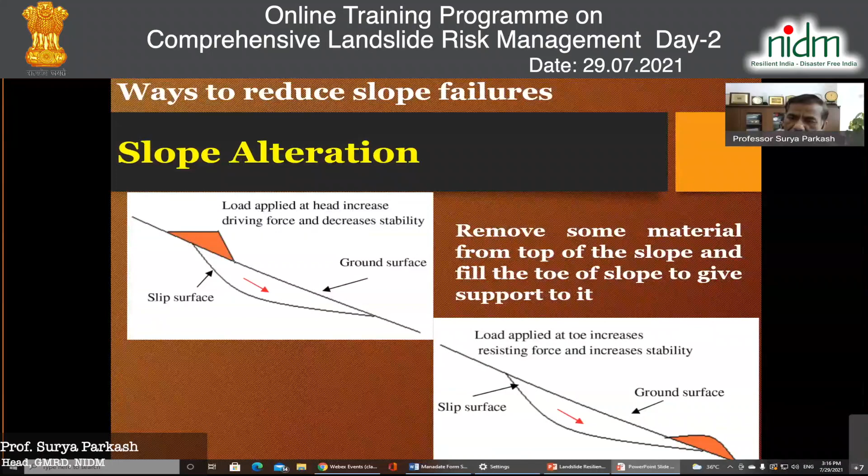However, if you put this load at the toe of the landslide, it will act as a resisting force and can increase the stability. So it will depend on where you are making the alteration of the slope and what kind of loading, unloading, and drainage changes you are making on these slopes.

I'm showing one of the better practices in terms of putting load against the toe of a landslide in order to stabilize it, or to resist the movement of the slope mass, by putting a weight against the movement. So people have created berms, and this weight of the berm is placed close to the toe of the slope's rupture surface, which prevents its outward and downward movements. So that will help in stabilization.

So if we are constructing a house - on the lower side diagram on the right hand side, I have shown a building located on a slope. Close to that building, they have created a berm so that the instability of this slope should not affect the building, and the slope should remain intact because of the opposing or resisting force created by this berm.

I told you about loose and unconsolidated weak materials, but there can also be good strong rocks with a large number of discontinuities, structural or tectonic features. In that case, there are likely different types of landslides, normally termed rocky landslides or debris landslides generated by rock debris. This may be a rock fall, topple, wedge slide, or planar slide along a discontinuity plane, or intersection of discontinuity planes daylighting into the valley.

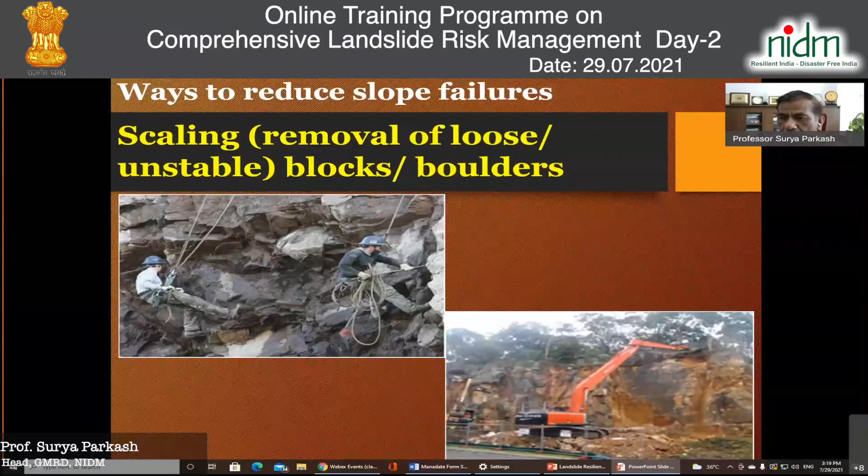Another simple feature I've shown in the photograph below. So these are the ways we try to do scaling, trimming, and create a geometry that is more stable than the existing geometry, relief, or morphology of those slopes.

Now, if the slope height is too high and the gradient is steep, it's likely that material will come down, because the stability of the slope will depend on the slope angles and also the cohesiveness and friction angle of those materials.

Angle of repose will also determine the potential angle of slopes that can sustain and stay safe. So what we need to do is maintain a relative height that stabilizes those slopes and does not destabilize them. We can measure the heights of the slopes and create benches so that stability is ensured. Once you create benches with appropriate heights, that also needs to be maintained, so you can create some kind of structures.

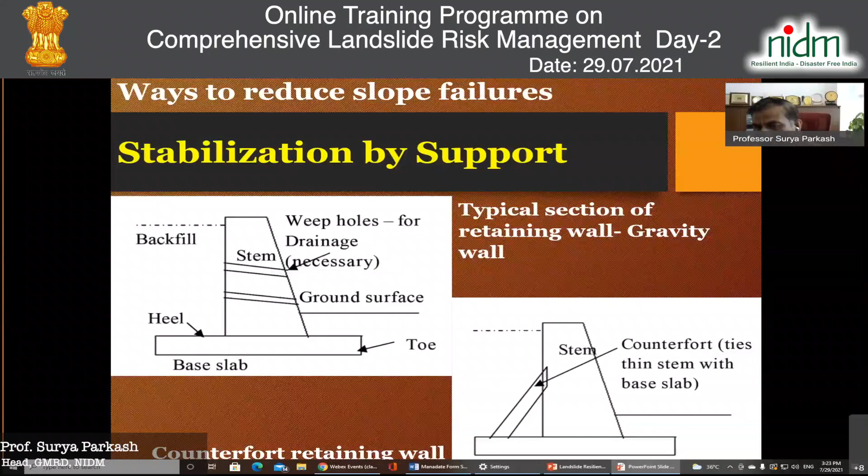So if you have a space to construct appropriate foundations with a base slab and create a retaining structure, either as a breast wall or as a retaining wall, it will help stabilize that area and prevent the slope mass movements. Sometimes if you don't find adequate space and feel that the wall is not well integrated with the slope, then you can also use counterfort tie systems with that stem wall.

These walls may not be just cement concrete walls, boulder masonry walls, cut stone masonry walls, or brick masonry walls, but you may also use some kind of reinforcements to bring flexibility into the walls so that it can have some kind of elasticity. You can use steel bars, and if used, it will also help reduce the sectional area of these walls.

So these retaining structures, you can see on one side I've just shown you a sketch, and on the other side I'm showing you a building with a retaining structure on its downhill side, which is preventing the movement of the mass and also providing stability for the structure against the impacts of landslides. Now there are several means to provide stabilization in and around the building areas.

Slopes a little away from the building itself may also start sliding and retrogress upwards, and that retrogressive failure can lead to engulfment of a building. So for that reason, we have to not only take care of the peripheries of the building, but also the surroundings of the building, which can also result in impacts on that particular building.

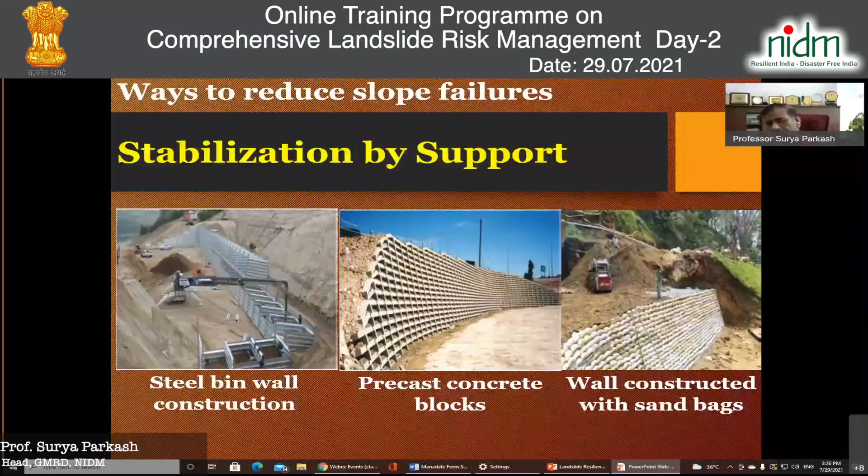In other cases, where the materials are strong and intact, you can use ground anchors, or with good soil conditions, you can even use soil nailing methods. But these nailing techniques are not yet common in India, and it needs to be practiced more. Similarly, rock anchors with bolts or pretension anchors are possible mechanisms to prevent failure in rock slopes.

But there are three different types of materials you may come across in any slope in the hills. Basically, broadly, these are defined as rock masses with discontinuities present within or across them - they may be massive also. The second is debris, a mixture of soil and boulders or rock fragments, where more than 20% is aggregate rock masses or pieces found in the debris material. Then you may come across earth or soil, which has very small grain size, normally less than 2 millimeters, which can also get destabilized.

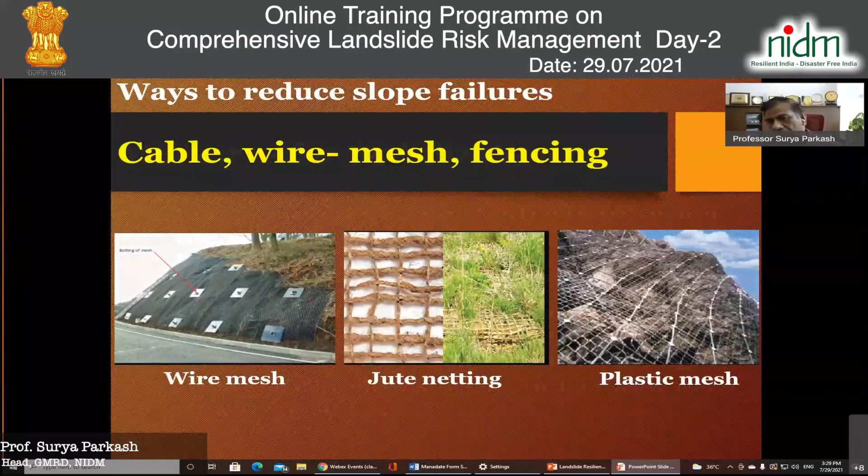So stability problems most often occur when a house is built over soft soils. Particularly, if you have a mix of permeable and impermeable materials, that can be one of the reasons for landsliding. Or materials made of clay minerals, for example montmorillonite or bentonite, which swell and shrink very fast with the ingression of water into them. This swelling and shrinking sometimes results in development of cracks, destabilization and displacement of the slope mass.

So this kind of nature of the material underneath or around the building must also be properly examined, and one must get geotechnical investigations done into those areas besides the local geological, geomorphological, hydrological and land use land cover conditions.

Determination of these geotechnical properties will include the stiffness, compressibility, cohesive forces, and pore water pressures that are likely to affect the strength of these materials. Both in situ tests in the field and laboratory tests by taking samples from the field to the laboratory are possible.

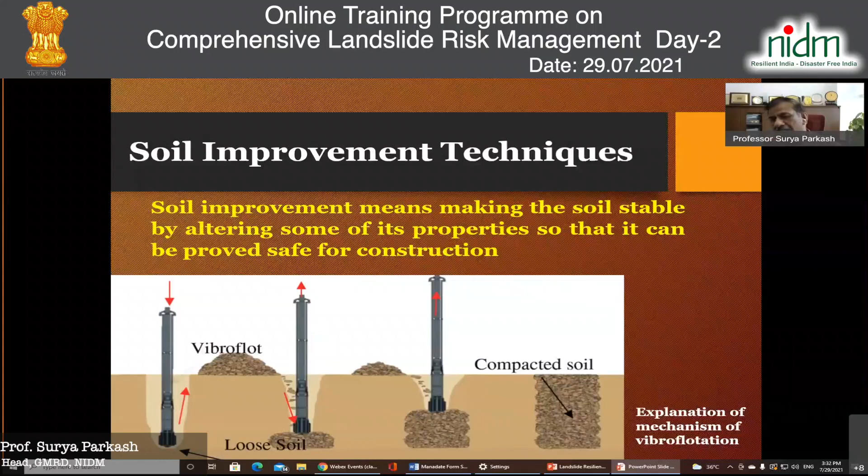I'm just showing you a picture where compression leads to the upcoming of a soil mass, because this mass, which is unstable in one area, when it gets compressed, the other areas exert and try to release that compaction pressure, and we have to actually compress or compact the whole area.

Soil improvement techniques are many. One is static loading conditions - you just put up load at a particular site, and under that static pressure, the soils get densified and compacted. But you can also use dynamic compaction techniques or rollers, which use cyclic loading conditions, making it stronger over a period of time with multiple impacts of that load through a dynamic process.

Then, if buildings are located on materials which have a thick deposit of unconsolidated, loose or weak materials, with a rocky mass below that layer - maybe 2 meter, 3 meter, 5 meter - and a big building construction is required, then you can also go for pile foundations. Pile foundations may be precast piles, or you can go for in situ pile construction techniques. These piles will take the foundation into the stable rock masses, so the building will not easily get affected because of the superficial unstable soil mass or debris mass.

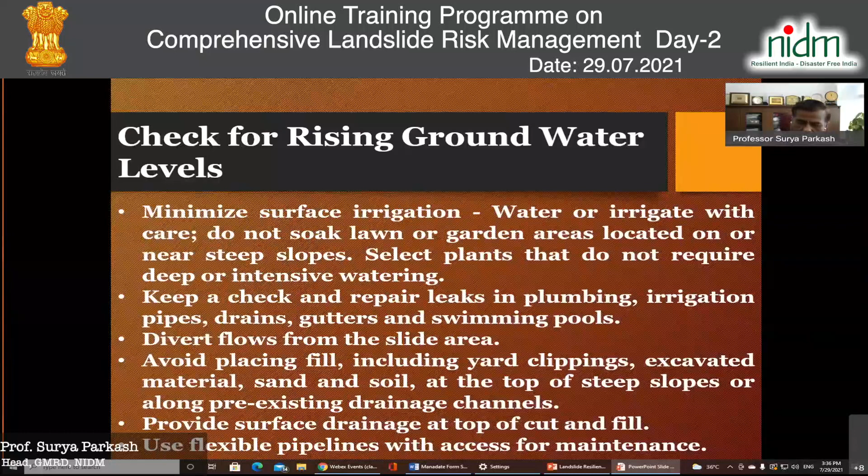These are some suggestions I've told you. But an important thing to take care of is that because we are constructing on slopes, there will always be some degree of instability or movement and displacement. In those cases, the material we use for pipelines or channels should be flexible so that it doesn't get easily ruptured. That kind of design and material must be utilized.

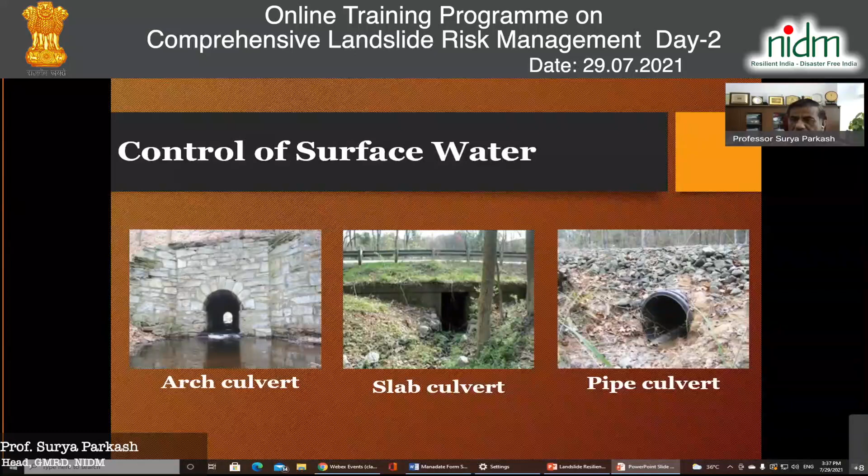Control of water is important - sudden, speedy, fast flow of water can lead to scouring and erosion or loss of toe or bottom of hill slopes, causing landslides. Normally in Indian standards and codes, we prescribe construction of side canals, side drains along roads, and disposal of this drain water through culverts into the main river system appropriately. Similarly, for areas covered by buildings, we should have appropriate drainage design, construction, and maintenance so drainage does not affect slope stability. I've shown you different types of culverts or pipes used - flexible pipes, slab culverts, or arch culverts. There can be many designs depending on geometry and materials used.

It's important, if living in a building on a slope, to regularly check for signs or precursors of landslide failures. These may appear as development of cracks within the ground or walls, or gaps between frames and doors or walls. All these things we've mentioned must be witnessed and monitored well. Sometimes you see differential settlement, bulging, or development of cracks within or around the building.

In such cases, you must use flexible structures with brickwork, concrete work, timber, or steel frame or panel claddings, so that movements can be registered or opposed, and water that is blocked and creates pore pressure may be appropriately released. If it's the relief or slope gradient causing instability, that should also be modified and adequately protected with engineered retaining walls or biotechnical measures at an appropriate slope and height.

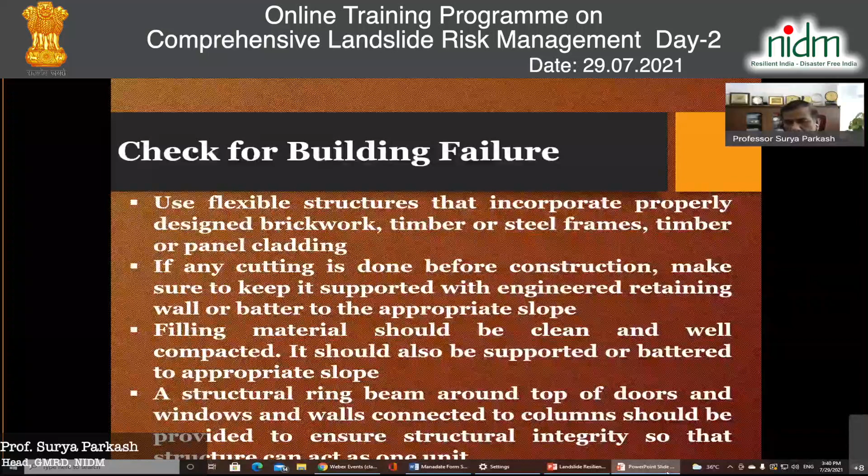So these are some of the things which need to be done. Now, in any building construction, you are using different types of aggregates, which include the cement, sand, and aggregate mixtures,

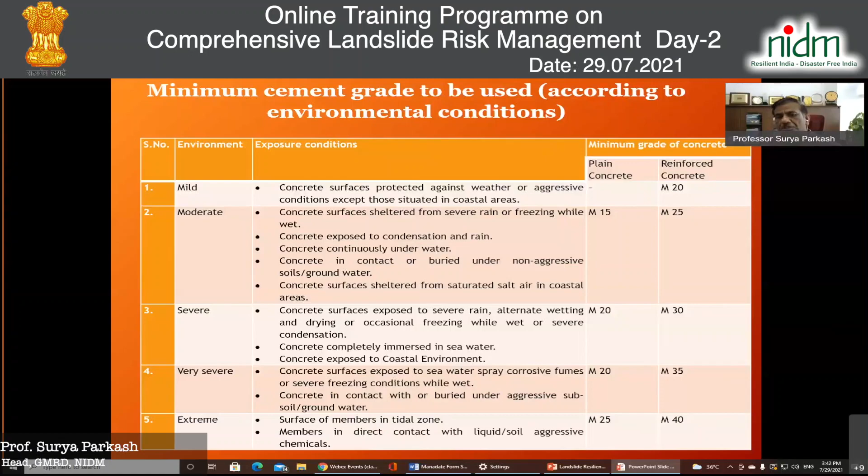and there are different prescriptions for different types of environments under the codes, which I have just listed. If it is mild environment, meaning the concrete surface is protected against weather or aggressive conditions except when situated in the coastal area, you can use reinforced concrete with M20 ratio, that is 20 megapascal should be the strength of that material. You can use these similarly in other areas. As you go to higher risk areas, a higher strength of material is required, so we prescribe M30, M35, and M40 depending on the situation in that particular area.

Some important considerations: first, in any building construction, is siting, where it is located, and the stability of the slopes where the plot or ground is located for construction of the building. After ensuring the stability of the ground or slope, you have to look into the foundation of that building. That foundation should get well integrated with the slope mass or ground mass so it doesn't move easily. So the type of foundation, material for the foundation, and construction techniques also need to be taken care of.

I suggested some of these foundation techniques which are being followed by our civil engineers. For example, for short story, small buildings like residential buildings, maybe up to 3-4 stories, raft foundations are used, and this foundation is particularly good if you get across a rock mass. If the rock mass is fissured, we must go for grouting to strengthen that material or go for anchoring of the rock mass.

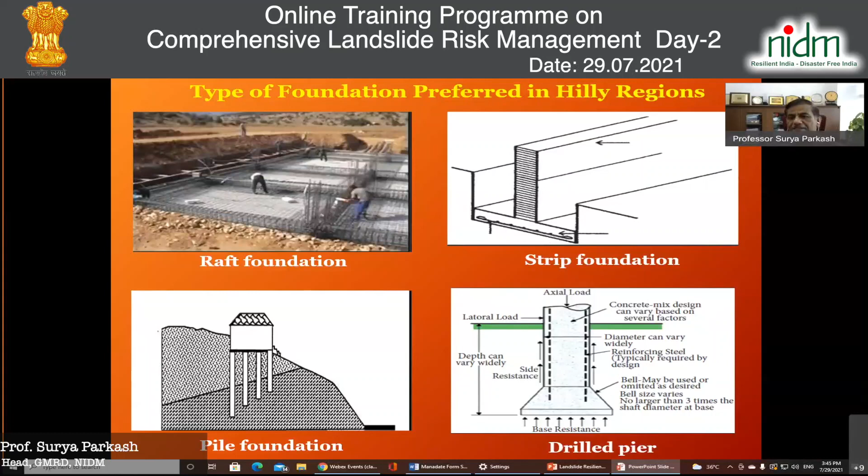Just showing you some of the types of foundations that can be utilized on buildings on the hill slopes: raft foundation, strip foundation, pile foundation, and drilled piers. Sometimes when the building is too big and heavily loaded, and the slope mass is too unstable and weak, we can also go for pier drilling.

The traditional building materials which have been used include earth, soil, wood, timber, bamboo, mat, corrugated iron sheets, stone, bricks, concrete, asbestos sheets, lime, slates, etc.

Whereas in today's world, people are using alternates. They are now using more concrete blocks, ash bricks, fly ash bricks, precast stones, concrete blocks, and stabilized soil blocks, etc. I'll tell you an example: in Leh, when they were using sun-baked bricks, they failed. The buildings collapsed when the flash floods happened in August 2010.

Similarly, even the walling materials can vary, both in the traditional and alternate building materials being used. I'll not go into more detail because I know there are other speakers also to talk, so I'll just skip the detailed part of it.

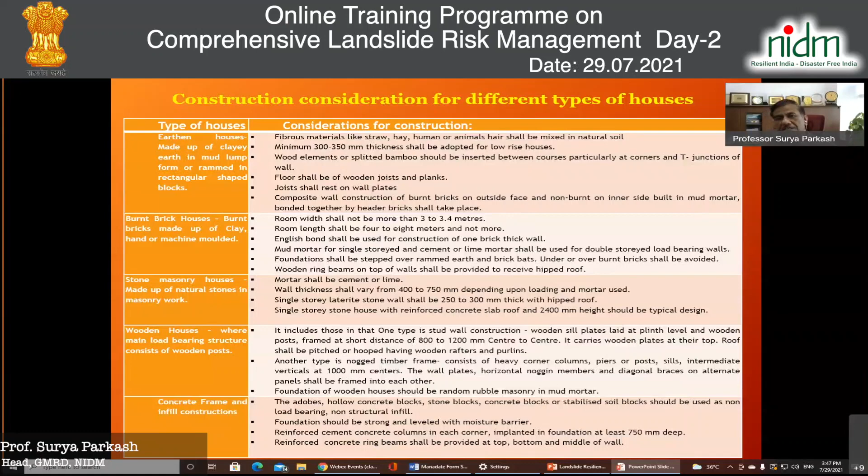You can learn more from our book, which I have already told you has been prepared on construction of safer buildings on unstable hill slopes or hilly terrains, which will guide you on different types of buildings, for example earthen buildings, wooden buildings, or stone masonry buildings. Depending on the type of material and construction techniques, they will vary, and accordingly we have to check and examine the impact of these buildings on slope stability, and take appropriate, timely protection and mitigation or preventive measures.

Now, despite all our efforts, nature being mightier than man, we may come across landslides in the built environment. Now, landslides in built environment will also give us early warning in terms of precursors or signs of failure, and these must be timely observed so that lives are not lost.

Besides the elements of the building, there are many service lines and utilities, for example sewerage pipelines, drinking water pipelines, or irrigation pipelines or canals, which may get leaked or ruptured and release water into the slope masses, resulting in landslides. I remember there was a landslide in Sikkim, close to the Sikkim Supreme juice factory, where leakage from a pipe led to destabilization of the slope mass and a major landslide that affected that factory.

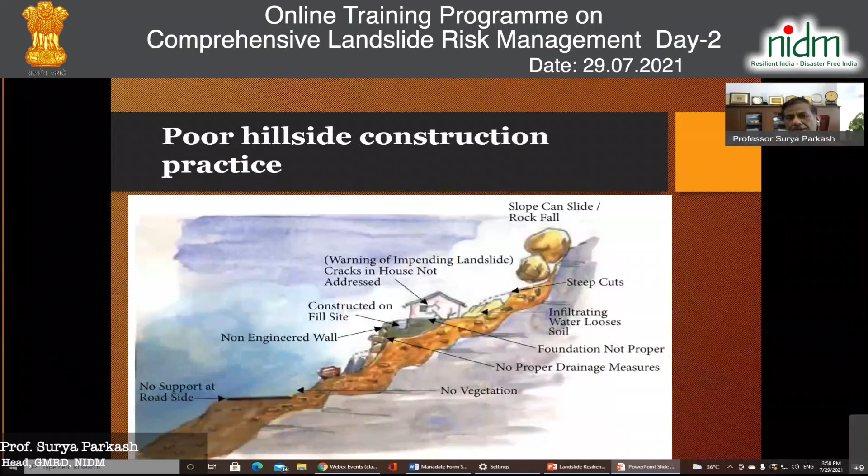Now, what can be the better practice, the good hillside practice? First, take adequate and appropriate siting or selection. One must select the least hazard-prone or susceptible area, and then follow good practices of construction, including stabilization of the ground, opting for appropriate foundations and materials for construction of the building in a landslide-resistant design manner, with adequate land cover and drainage measures for the stability of the slopes.

These are some of the things I wanted to share. There are so many things one can share. Even for siting, there are guidelines. In old times, people did not construct buildings close to the foot or toe of the slopes, or just at the ridge of the slope. They knew this well by virtue of their living experience. But with the passage of time, we have lost that traditional wisdom, and hence we need to work on it and give appropriate solutions for landslide-resistant buildings and infrastructure.

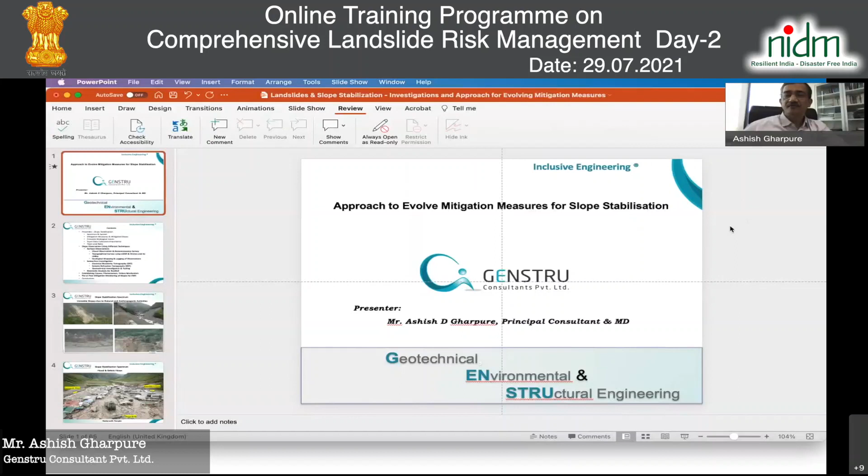I'll straight away go to share the presentation. Hope you can see the presentation. We are able to see, but it is not in presentation mode. Is it now? Can you just move the slide to check? Yeah, okay, perfect, thank you. Please go ahead.

We'll be talking about engineering approach to evolve mitigation measures for slope stabilization. I'm sure you must have heard by now the causes, the phenomena, what is landslide, what is the difference between landslide, rockfall, and so on. My idea was to focus on that. We know it's a slope stabilization issue. Now, how to approach it in an engineering way? Typically, people think that an expert would come and solve the problem.

I want to show you how the things are evolved, because there is deep investigation needed, and only after that we come to know the phenomena and can give the solution. So the way I've organized my presentation is just a brief preamble, to set the tone on what is slope stabilization, what is the spectrum and spread of it, what are the mitigation measures. I also want to point out the complex geological issues faced, and the importance of input data, the team and the roles. I want to highlight that it's the team which works and not an individual expert.

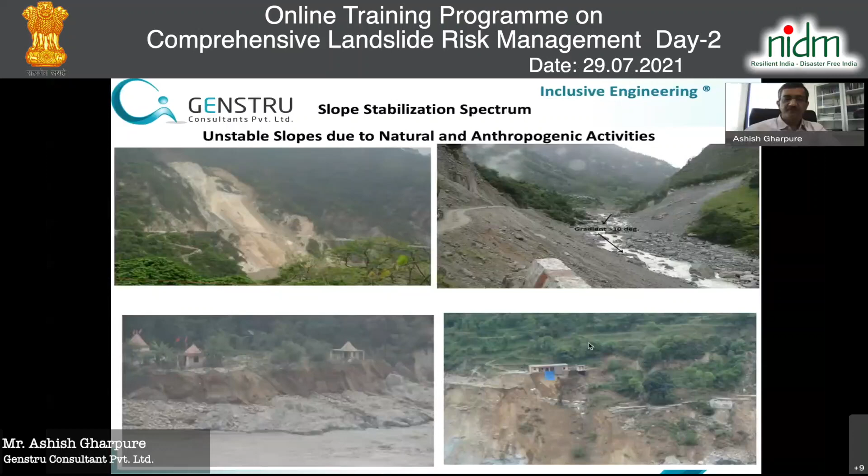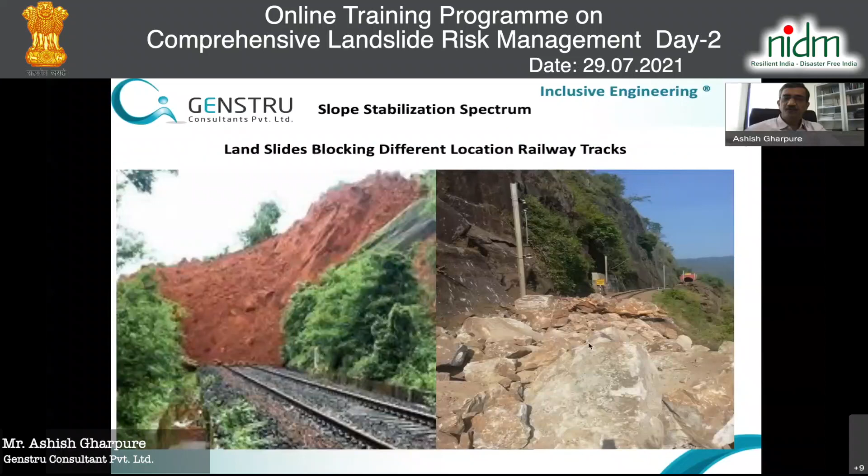Slope stabilization spectrum: unstable slopes due to natural or anthropogenic activities. You've seen photos of people living in the Himalayas, Mandi people there. You must have heard about the Kedarnath tragedy, that was a debris flow due to huge mud flow. We've worked here as well. Then Konkan Railway's laterite soil and rock sliding down. Then rockfall even in East Coast, granite rockfalls are there. They worked for Bombay Pune Expressway, Khandala Tunnel and Adoshi Tunnel, what issues were faced there.

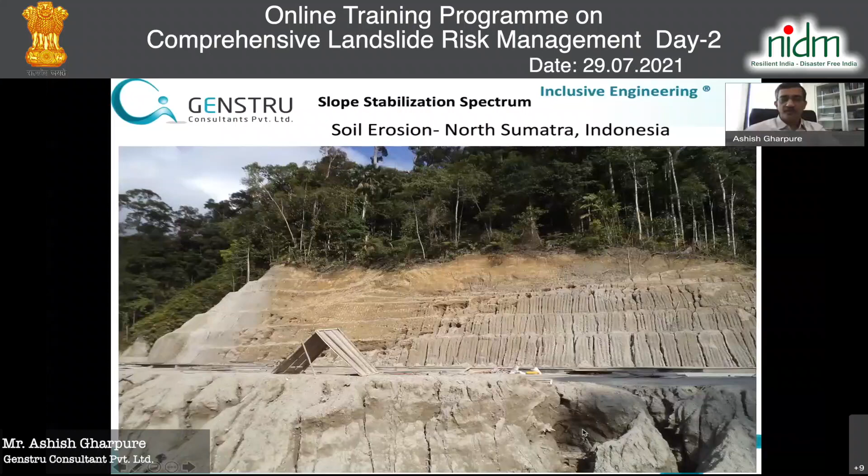Another issue beyond landslide, but which can be catastrophic and people don't realize it, is erosion. That erosion can be as heavy as you can see in the bottom part of this slide, there could be a big hole even an elephant can go in, and eventually this leads to caving in of the slope.

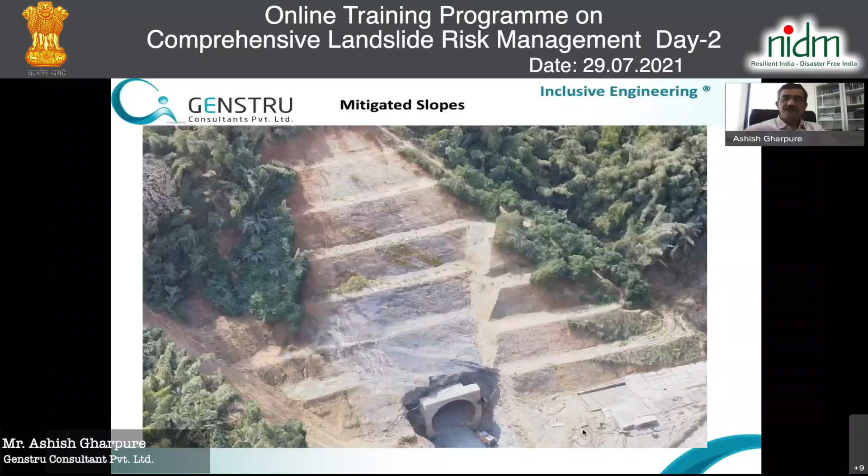When we deal with landslide or slope stabilization with soil, versus rockfall mitigation, it's a slightly different approach. We can go for protection measures, retention measures, or prevention measures, and again there are subcategories as well in that. So for mitigated slopes, I'm showing a few examples: geometrical correction, reinforced soil structures.

Anchoring, nailing with erosion control mat on top, reinforced soil structure, portal protection works outside the tunnel, barriers. So these are just a glimpse of different solutions.

What are the complex geological issues? Conglomerate material, which is a soil and boulder mix, is very hard to treat. You neither think of it as soil nor as rock, so it's a very difficult material to treat.

Extremely varying geology. It's not that you look at one section and decide for the entire stretch. There could be varying geology in vertical and horizontal directions, so sometimes patchworks are needed rather than one single solution.

Presence of treacherous soils, clay stones, shales, soluble rocks, which can create sinkholes, huge subsurface flows leading to piping and boiling, and alternating strata between weak and strong material. When you are at strong material, you can't visualize the weak material underneath, which can lead to a slide failure. Presence of underground aquifers and presence or absence of vegetation in specific cases - even presence could be a problem in some cases, or in some cases absence is a problem.

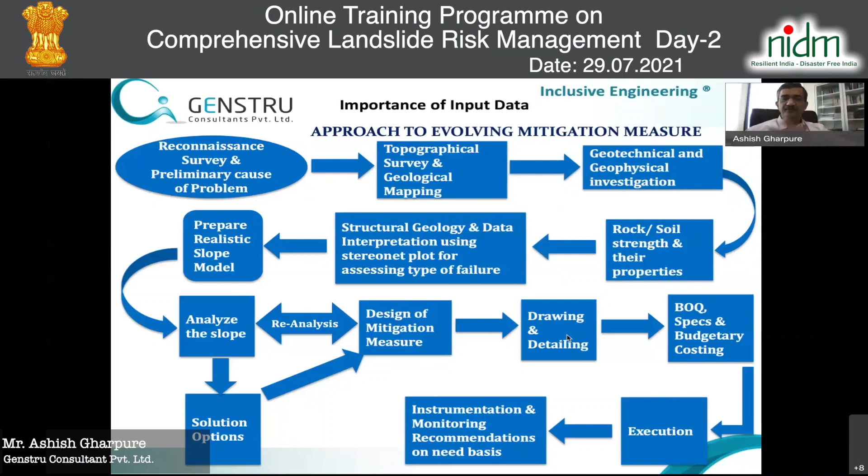People think, as I said, that some expert will resolve it. I'm just showing that if you have a geohazard solution to be evolved, there's definitely a geotechnical engineer who could be team leader. But along with that, if you have mitigation measures, sometimes it could be a suspension bridge or a bridge or a culvert, so you need a structural engineer.

We need to know the topography and key feature identification, so you need a surveyor. You need an engineering geologist for geological mapping, kinematic analysis, rock mass properties. You need a geophysicist for subsurface mapping and interpretation.

And as if this is not good enough, you need other data as well - knowledge about geomorphology, hydrology, environment, bioengineering and horticulture. Sometimes vegetation itself is a treatment. Construction management practices are also needed, because the solution you give must be viable and constructible, so that's another dimension.

Seismology and earthquake engineering - you need to know the triggers and how it affects instrumentation and telecommunication.

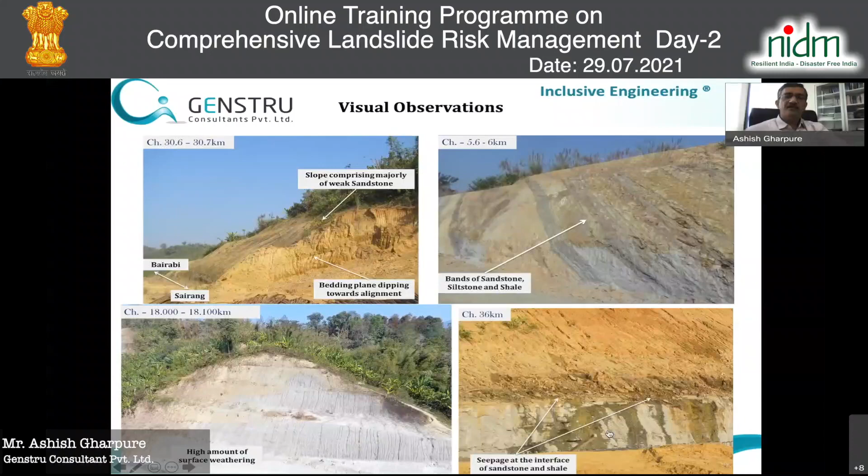So what we observe - starting with observation, you can see we observe the patches, where the wet areas are, how the orientation is, what kind of issues there are like gully formation, surface erosion, water seeping out. The first visit to site actually sets the tone for what you want.

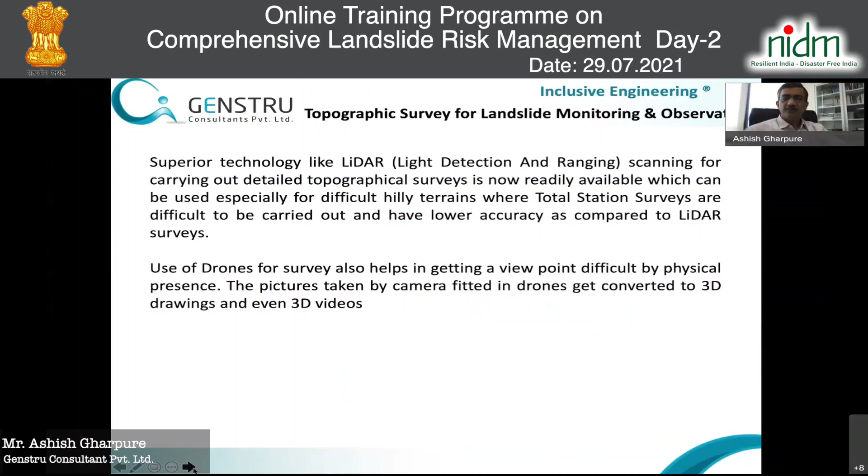You can use topographic survey for landslide monitoring and observation. Technology like LiDAR is in practice, and I'm personally a fan of drone survey because you also get the visuals very clearly. But there are many methods for judging what is happening, so even instrumentations like extensometer and inclinometer do triangulations. I've just listed out what all possibilities are there.

This is the description of which method you can use for what: continuous GPS method, INSAR, photogrammetric methods, LiDAR methods, geotechnical instrumentation method. Just to take a random example, INSAR is a very good application via satellite imagery, but sometimes you will not get the data right away when you need it, so for early warning systems you may have to take some time. Photogrammetric methods are very good where you can visualize the things. LiDAR gives you X, Y, Z data very accurately, and this can be practiced in dim light as well. And other traditional instrumentation like extensometer and inclinometer, and so on.

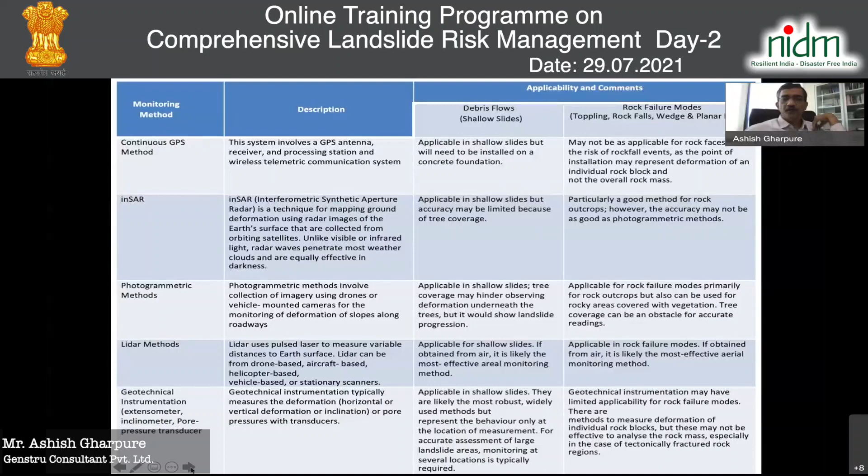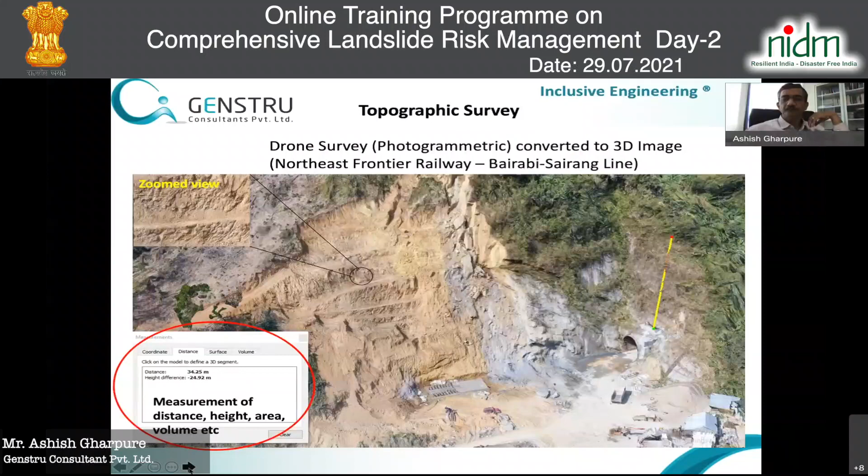Another drone image. When we went to this site and stood at this point where my arrow is, we thought the landslide was shallow, until we got this drone image and found out that much deeper penetration is there on the slope. So these are the advantages of using the technology.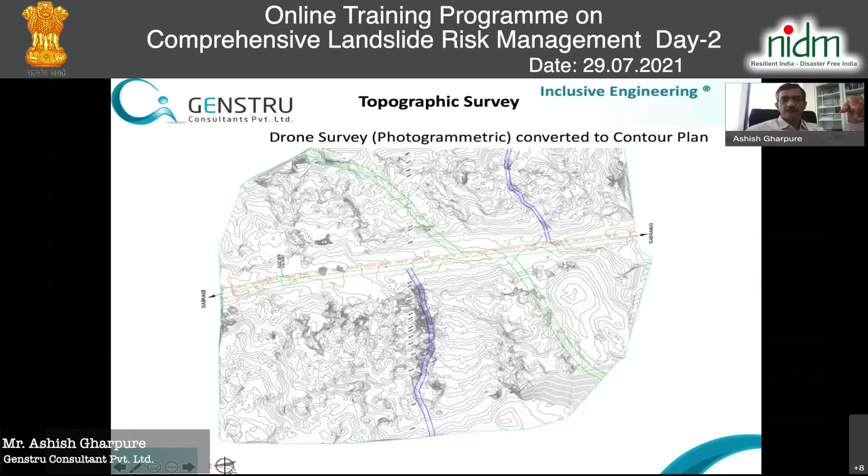Malingaon, this tragedy where around 200 people got killed, we had this complete 3D image. When you stand at the bottom part, you can hardly see the entire slope, but with the drone we could see right up to the ridge what is happening. It's all surface stripping which happened, and just by surface stripping, it actually consumed the whole village into it.

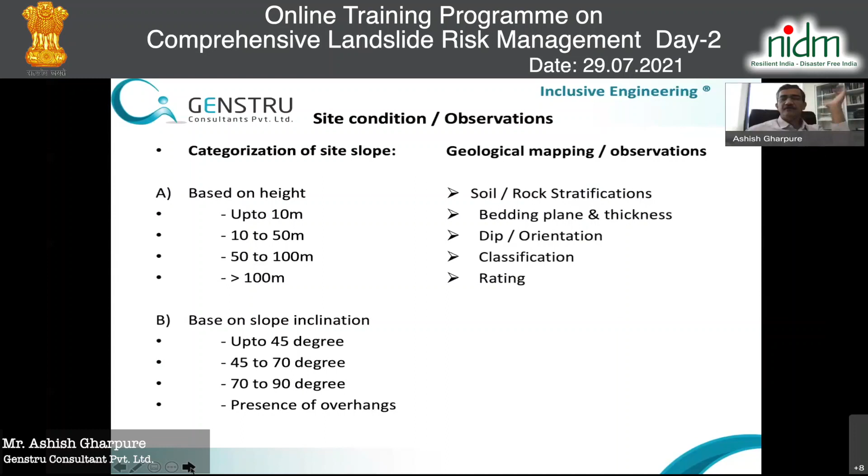So, other ways to identify things include use of drone survey and observation. We also get to know the fractures, foliations, and details of surfaces. Then, depending on site conditions and observations, you can categorize the site slope based on height, inclination, and type of geology, so you start converging on what type of failure to expect. Now categorization, whether it's soil strata, rocky strata, or mixed strata, and whether erosion is present, surface or subsurface erosion, what's happening and why.

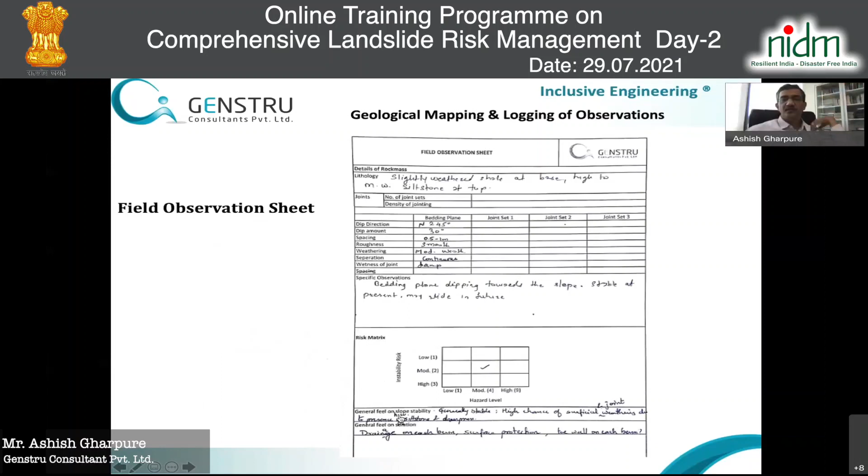These are gradually narrowing us onto the solution. We always carry this kind of geological mapping sheet, field observation sheet, so that we can map and note whatever we feel at site. All the time, this imagery cannot help, a visual observation is needed. So we note it down, and at the site itself we try to see what kind of solution we can think of.

Subsurface investigation - so this was surface or topographical survey, now we go to subsurface investigation. Electrical resistivity tomography is a very good method, typically to detect even the water layer and how the strata is.

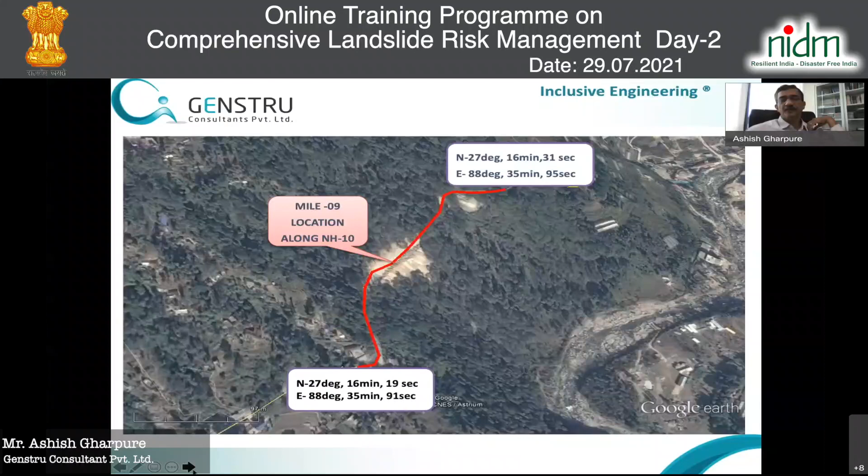This is one particular site, mile 9 in Sikkim, now called NH10. There was this Nala, Rani Khola, which was eating away the toe, and gradually the deflections were getting right up to the road here. We did some ERT surveys there.

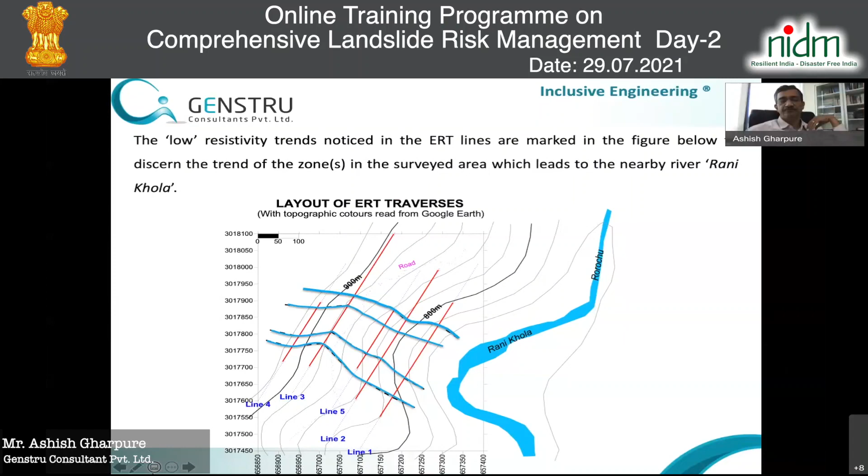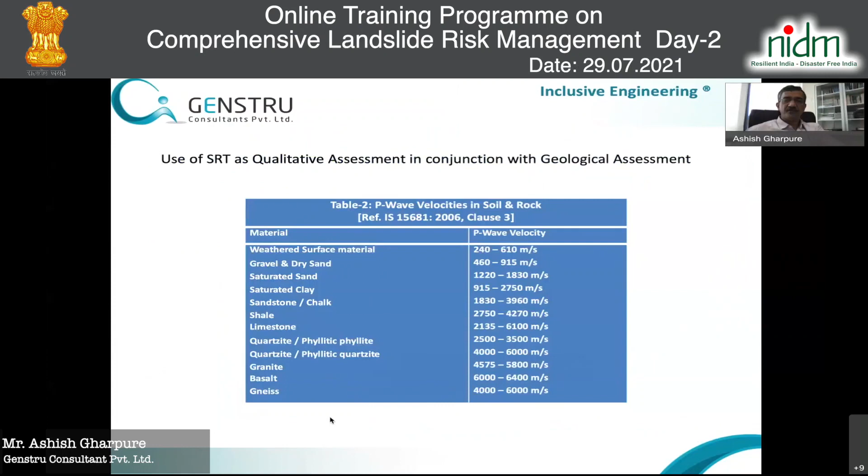Seismic refraction tomography gives you the substrata profile. Again, in a qualitative way, you can relate to the strata, what kind of material it is, sand, limestone. This is a wide range, so it only gives you a qualitative assessment. You need to know the local geology to say for certainty what is expected.

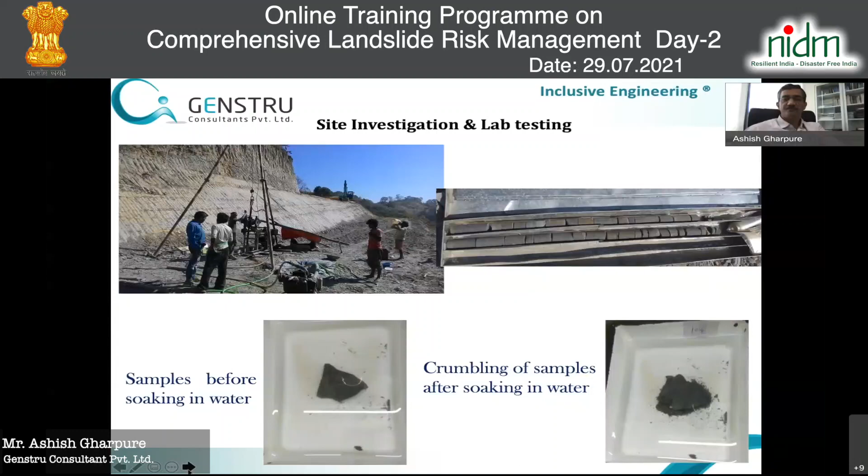Of course, along with this geophysical testing, you must carry out the traditional geotechnical investigation, because here it is where you get the real samples, where you can see, feel, touch, test, and then be sure of it. So you do the field investigation, you do the lab investigation, and find out the properties of soil and rock.

So now, after testing and all, you have all the data which is needed. You can now think, okay, if it is say a rock surface or something, then you can know the RMR of it. You can convert it to the Mohr-Coulomb method and get cohesion also of the rock mass. So you can use RocLab as the software for converting.

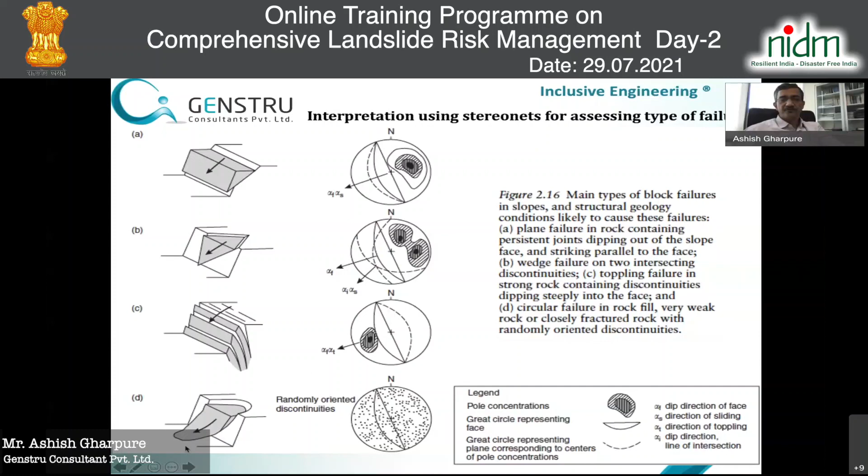So all these are observation and interpretation, and after that you come to know the phenomena, because unless you know the phenomena, you don't know what to do, otherwise you're just going with standard practices. So this is what we conduct. Now we know what is happening, whether it's flow, toppling, slump, slide, creep, or fall, and then we know what kind of solution might work.

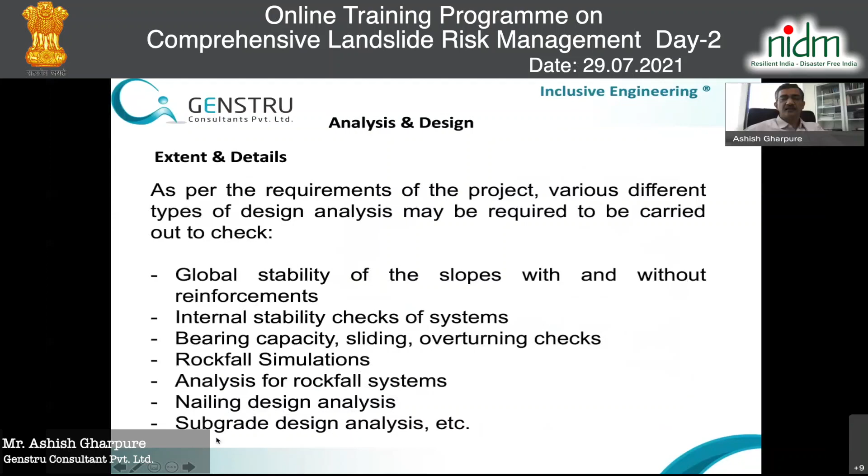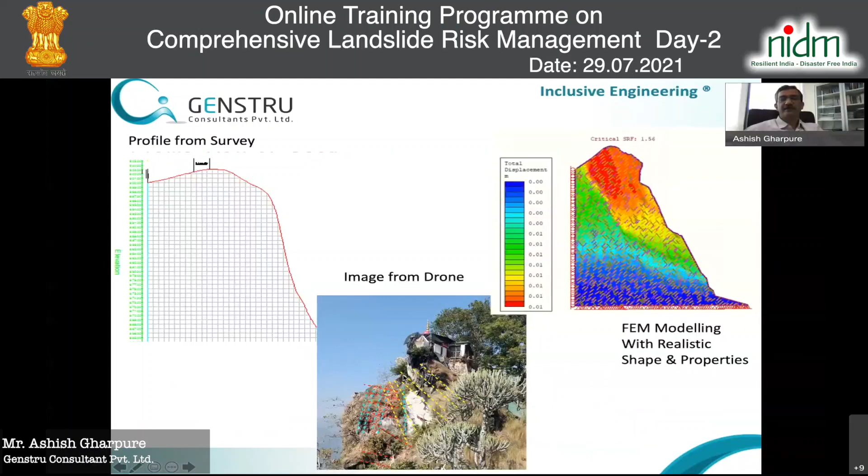So analysis and design is then taken care of. You have all the surface data, you have the geotechnical data, and then you can model it analytically, with the right kind of strata, either through limit equilibrium method or through FEM. Typically we use FEM where deformation gets critical and you want to model that. So through LEM or FEM analysis, you come to know the factors of safety are low, and then you want some kind of intervention. For example, this is a rocky area, Purnagiri temple, and we modeled the deformation as well, because those were causing trouble, the temple was seeing cracks. So we can do this kind of modeling.

Now coming to slope instrumentation and monitoring for early warning systems. What can trigger a slide is threshold rainfall, flooding event, seismic event, slope geometry alteration, forest fire, construction activity, or blasting.

These are the typical triggers which will start a landslide. And what we can monitor directly on slope: ground movement, ground acceleration, water table, pore water pressure. So you instrument your entire slope so you know what is happening there and attend to it.

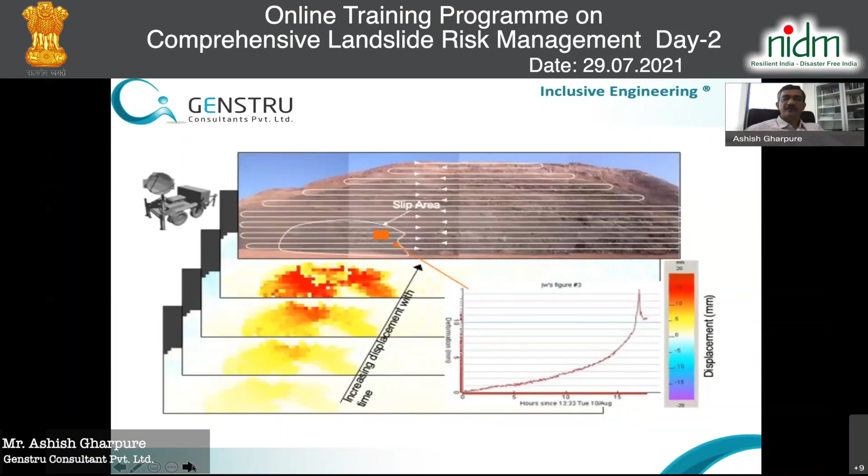There are also radars which can give the movement of any particular point you have noted, and you see the acceleration. Whenever the acceleration is higher, then you know that the slide may occur. So there is an elaborate arrangement where you can have multiple data consolidated into a single receiver system, and it can be transferred to your mobile or laptop so you can see what is happening, and you are ready for early warning.

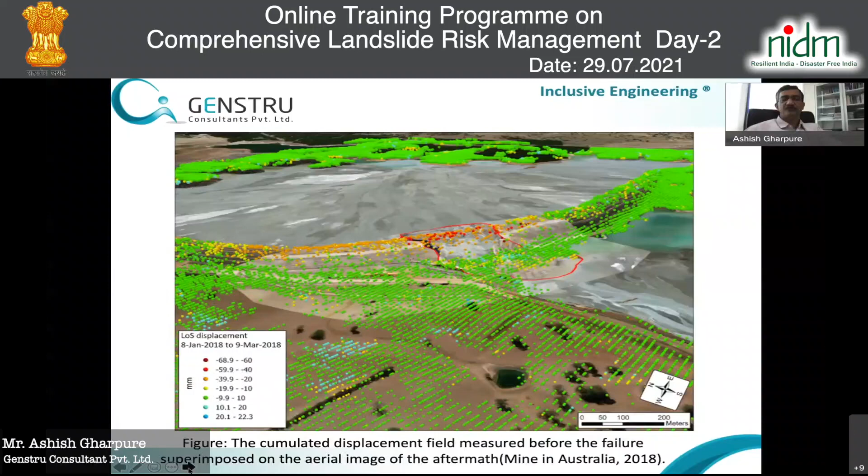You can even map with continuous data, a digital terrain model or digital elevation model, so that before the movement and after the movement, you see how much movement is there in a 3D way. So you know what is happening, where it is severe, and you can even monitor displacement versus time.

There are various types of failure which happen. You can see that here the displacement versus time was very gradual, and suddenly at one point the landslide triggered. Sometimes it is a curve, so you have exponential variation, and this is very typical when the failure is imminent. Sometimes there are various curves like movement and consolidation, then movement and consolidation, at some point in time.

So if you leave your judgment when the consolidation has happened and there is no more displacement, and you stop monitoring it, you never know when this next series is picking up, and it may trigger failure. So keep monitoring and avoid that.

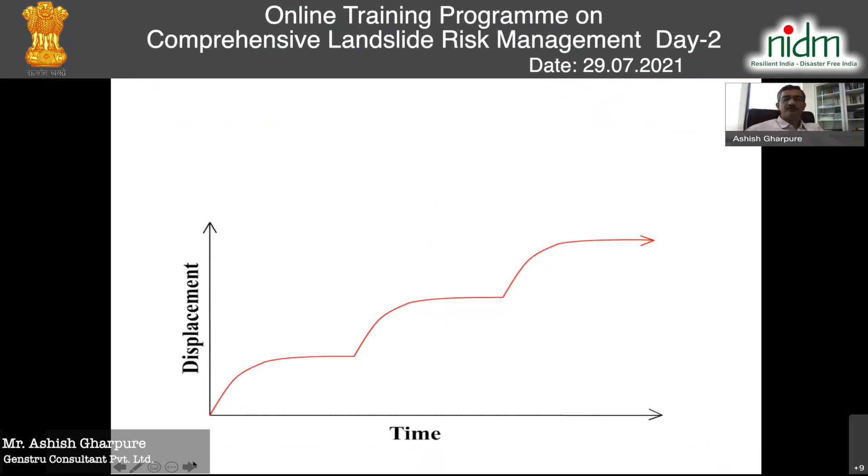Water pressure monitoring, so you know when pore water pressure is rising, your safety factor is coming down, so you have to establish a threshold and you don't want to cross that. Before that, you want to take action to take out the water from the matrix.

So coming to summary: slope stability issues need careful data collection. Drone survey and geophysical tests augment and improve observational and geotechnical parameter assessment. Various monitoring tools like geodetic monitoring, satellite or drone monitoring, other imagery systems, settlement gauges, piezometers, rain gauges, ground acceleration monitoring tools, etc., have enhanced precision and eased the data collection.

Early warning systems and mitigation measures designed on reliable data would enhance the performance, optimize the cost, and reduce the risk of hazards significantly. So thank you very much.

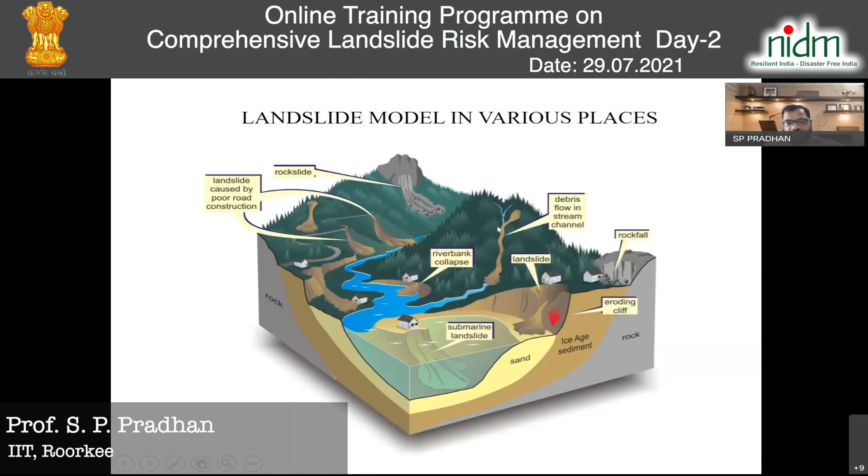So why is landslide important and how will we address this? If you see the cost-to-benefit analysis of different natural hazards, you can see that the landslide cost-to-benefit ratio is high, that means if you prevent it, we can save more.

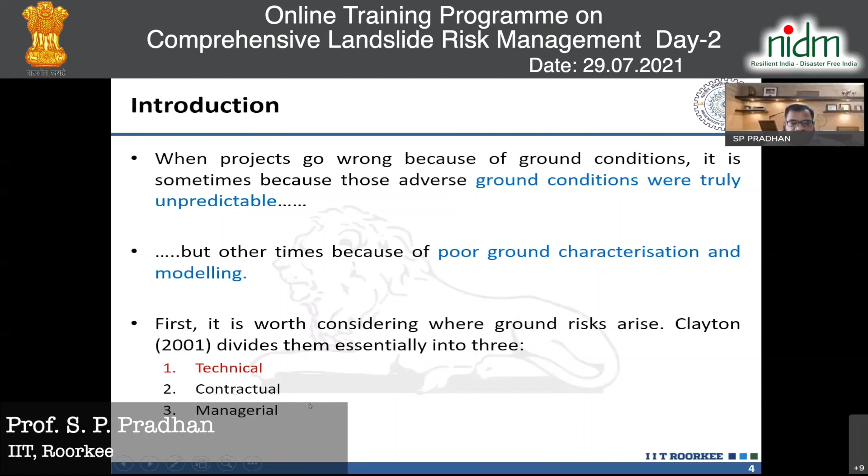We know that ground conditions are really unpredictable, and as an engineering geologist, you should address this uncertainty, so that it can be easily incorporated into your model for slope stability analysis. The ground risk can generally be categorized into technical, contractual, and managerial. The technical risk involves encountering unknown geological conditions and incorrect design criteria, so we will be talking about these geological conditions.

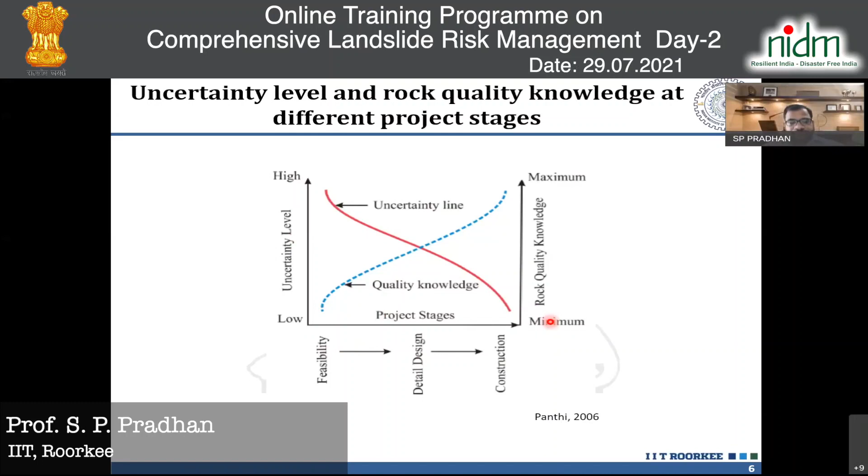In any project you take, whether it is landslide, tunneling, or dam site investigation, initially the uncertainty level is more and your quality of knowledge is less. Once you go from feasibility to the construction stage, the uncertainty decreases and your quality of knowledge increases. And once this decreases, you become confident about your project. So we'll see about these unknown geological conditions.

I have divided these geological conditions into two types: one is micro scale and another is macro scale. In micro scale, you have geological material, and in macro scale, you have geological mass. At micro scale, you go to the mineral level, because rock is made of minerals, and we study the mineral level. Once those minerals constitute the rock, that goes to your mass level, or mass fabric.

The landslide is a process of mass wasting. It happens everywhere whenever the shear force is more than the resistive force, or your shear stress is more than your resistive stress. So you need to characterize what contributes to these shear forces and what contributes to the resistive forces. Once you are able to characterize this, then you can easily analyze landslides.

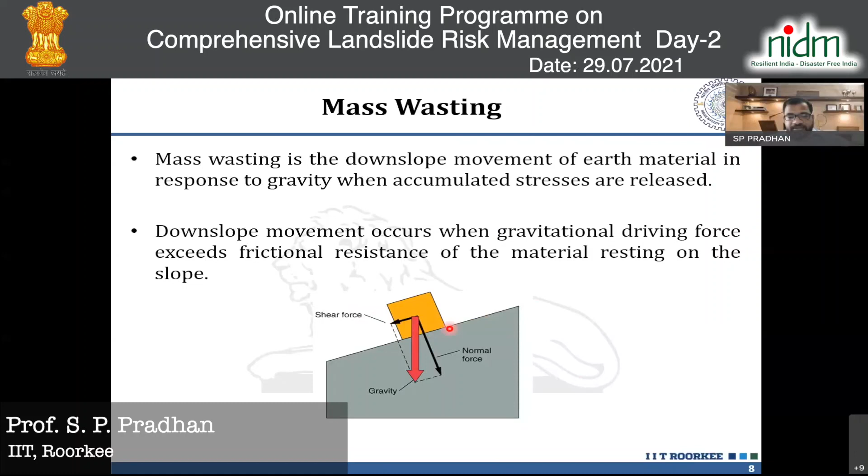If you have a higher slope, the higher slope has more shear force, the shear component is more, so there are more chances of slope instability. And the friction resists your block.

So what are the controls that affect landslides? One is driving force, and one controls your resistance. The driving force is characterized by the material characteristics, the type of material, the nature of the material, the strength of the material, the slope angle. The control on resistance is friction, because it's an interplay between your cohesion and friction. So what are the factors that contribute to friction? What are the factors that contribute to cohesion? What are the factors that reduce your friction? What are the factors that reduce your effective stress? That is what we should know.

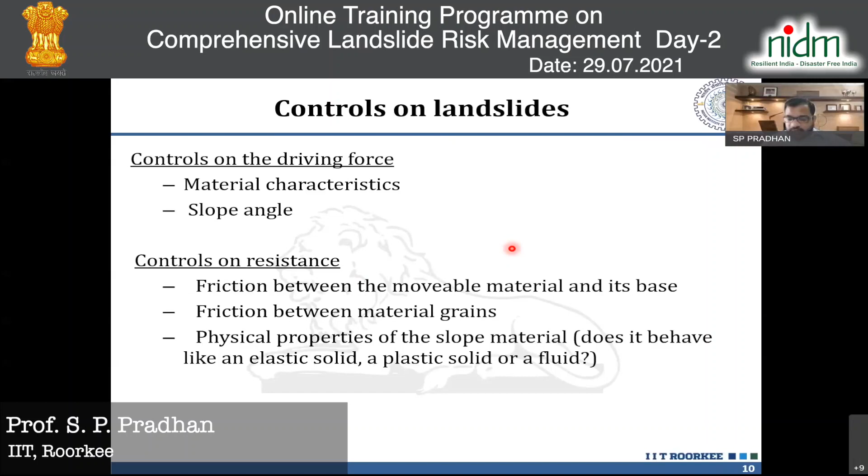So we can divide the causative factor into natural and anthropogenic. In natural, you have inherent property which is related to geology, meaning the rock or soil itself, and the external factor which may be due to seismicity and rainfall. And you have anthropogenic factors like widening any road, doing deforestation, not utilizing the land properly, or doing ill-planned construction, that also leads to slope instability.

Out of this inherent property, you can see lithology, meaning the nature of the rock. The structure means what discontinuities are present, whether there are faults, joints, folds. Then the slope itself, the relative relief, land cover, and the hydrogeological condition. These are all inherent properties specific to your earth material. And these external factors are triggering factors - they trigger the landslides.

So let's go to this mineral scale. We have intact rock and we have rock mass. Intact rock means that is devoid of any fractures. You take a small piece of rock and test it, see what is the mineral composition, what is the density, what is the porosity, permeability - all these are related to your intact rock. The mineral composition is related to geological origin, whether this is sedimentary rock, igneous rock, or metamorphic rock.

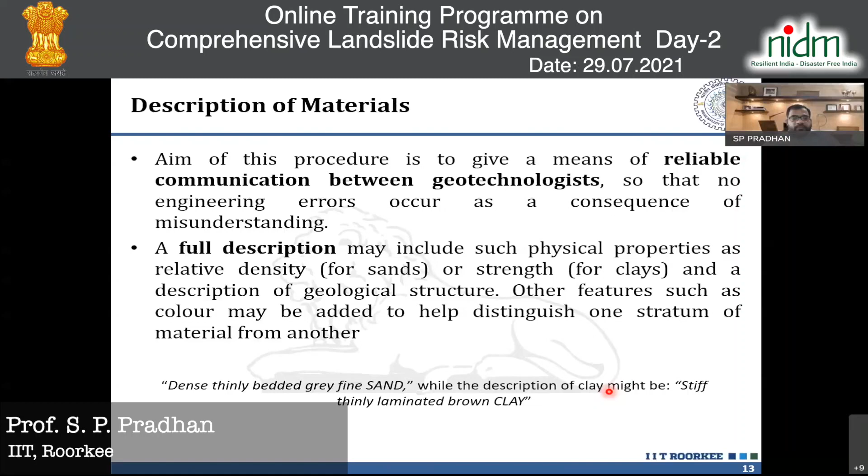Suppose you are seeing the color - there is a slope and you say, okay, this is sandstone. But if you see, this is red sandstone, you mention the color. Suppose this sandstone is fine sand, you write fine sand. So these details will be helpful in encountering any uncertainty. Sometimes we miss the detailing, and suppose you have fine sand versus coarse sand, the property will be different. Only putting sand is not justified. So if you put this detail, then our project will be successful and our quality knowledge will increase.

So what is the property of the measurement we need to do? We need to do size and shape analysis of grains, then the density of grain, how they are packing, then the nature and strength of bond between the grains, and how they are distributed - whether the grains are randomly distributed, layered, or oriented.

Suppose you have taken a rock piece and you have seen the grains are randomly distributed. In another case, you have seen the grains are layered or oriented in a particular orientation. If that is oriented in a particular orientation, that will give you sliding surfaces. So that we should mention.

As I told earlier, whenever we are doing any soil or sediment classification, we'll put silty sand - meaning this sand has silt, and the proportion is more. Suppose sandy clay is more, sand is less - so we need to put this. If you see there is an entire spectrum of your grain size given, then you can say this is silty, sandy, gravel. From this, you can easily assess or get an idea about the shear strength parameters.

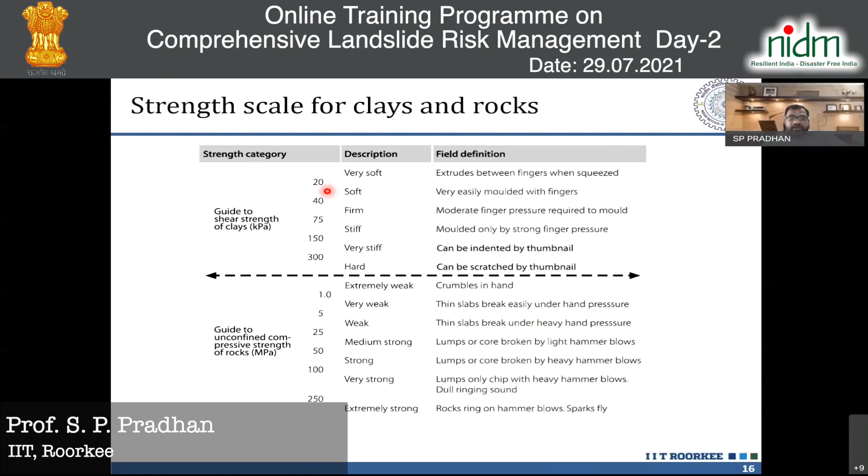So why I put this, because this will be very helpful while doing preliminary study, which will give you a qualitative idea that may translate into some kind of quantification. That will be helpful in studying the earth material.

Then many times I came across how do you identify a rock into different types, whether it is sedimentary, metamorphic, or igneous. Then again in sedimentary rock we categorize into fine, medium, and coarse depending upon the grain size.

Similarly in rock we get this type of thing. So that becomes a sedimentary rock, meaning the grains are bound by sediments, cements. Then you have metamorphic and igneous rock. Metamorphic rock is generally foliated, there is layering of minerals that is visible. Igneous rock is crystalline, and the minerals are randomly oriented.

So few of these are seen by your naked eye, and a few need a lens, if you have medium grained minerals, and some need a high power microscope. So on the basis of this, you can categorize and identify the rock types in the field.

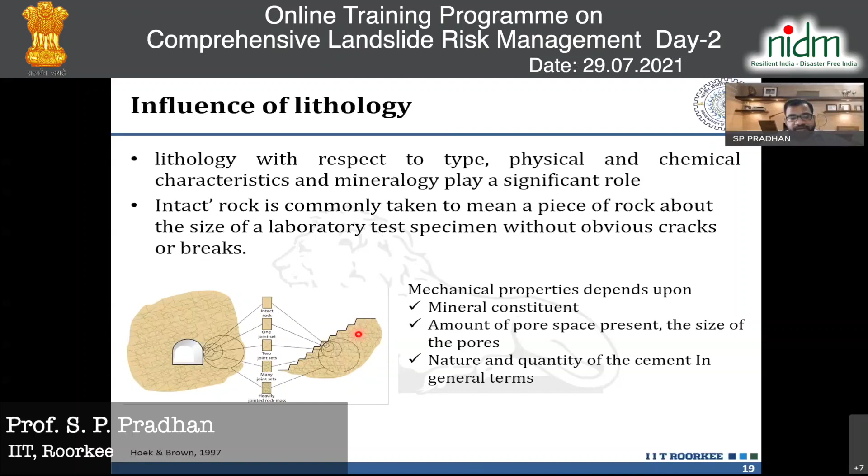Dr. Ashish also told about this, that if you have a slope alternating with hard rock and soft rock, then you need to identify it. You can see here this rock seems to be soft and this is hard. So with time this will get eroded, and there are many discontinuities present. With time, with weathering, this portion will fall, so we'll get a rock fall here.

This needs to be addressed. I have to look at the entire slope, what are the lithologies, what is the lithological contrast, and that I need to evaluate.

As I told earlier, no rock can be stronger than the minerals of which it is composed. Similarly, rock mass is not stronger than the intact rock. While identifying minerals or rock, this becomes very important, because if you are finding any rock which is calcite or gypsum, then if there is any interaction with water, it may cause serious problems. It may cause landslides, it may cause sinkholes.

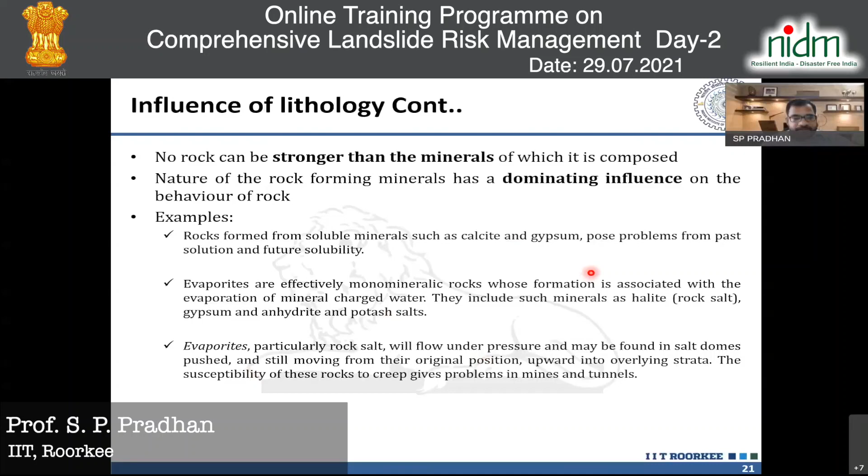Suppose you got rock, and in rock we are finding weak layers, or foliation, or layering. If you are finding any foliation or layer that is dipping towards the slope, then there are chances of instability.

If you see the general strength of common rock types: we have igneous rock, like granite, basalt - these are stronger. Metamorphic rocks are very weak because they have foliation planes or layering; once there is layering in the rock, it is susceptible to sliding. Then you have sedimentary rock, and in this case, the rock strength varies a lot. If you have igneous rock, the rock itself is strong, but if there is discontinuity in the igneous rock, that may lead to instability.

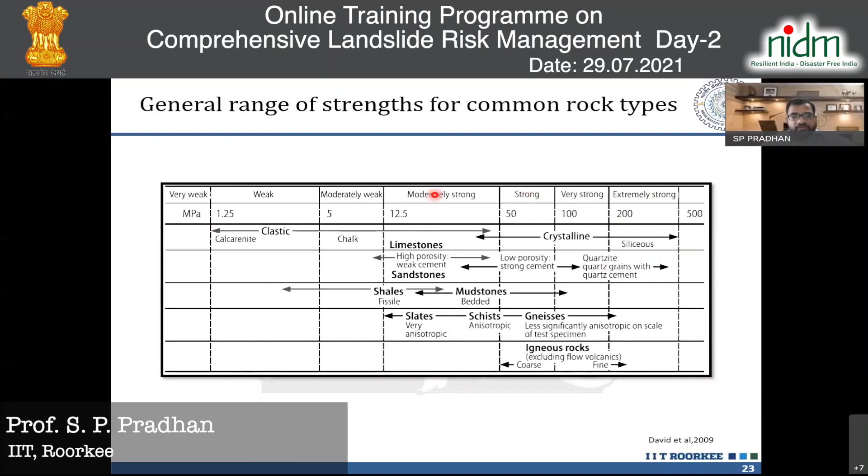So we can categorize rock on the basis of strength, from extremely strong to very strong, strong, moderately weak, and very weak.

We can see how density, as I told you, influences compressive strength. Once you take a rock, if it is closely packed, the compressive strength of this material will increase. So whenever you see a basaltic section with a few meters having pores or vesicles, these pores may create some problem. Suppose you have sandstone - in one case the porosity is more, in another case the porosity is less. Higher porosity may lead to less strength.

Weathering also influences these rock parameters or rock strength parameters. So whenever we go to any slope sections, you may find that at the top you have soil, then you have mixed soil and rock fragments, then you have fresh rock.

So weathering can be seen in the field, and the evidences are like discoloration of the earth material, then there will be an increase in infilling materials. Suppose in joints, there will be some infillings present. There will also be decomposition of the material.

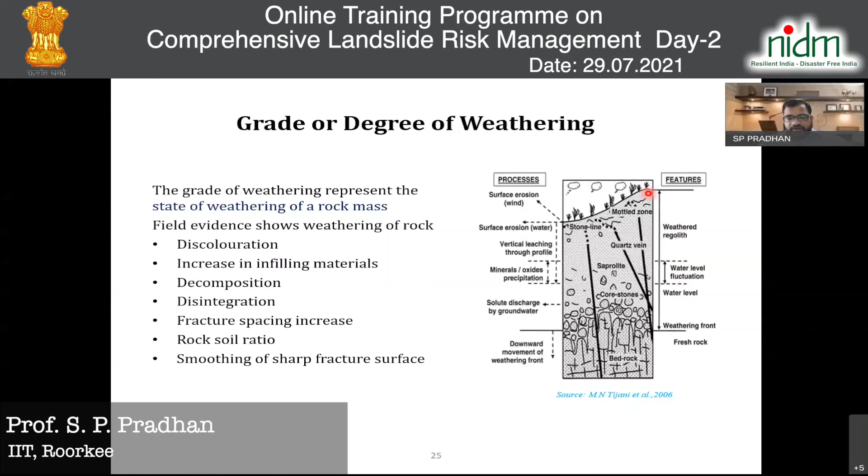From this, you can categorize the different types of weathering grade. It starts from fresh rock, with no visible sign of weathering, up to 6 grades. If there is discoloration, you can say it is slightly weathered rock. If half of the material is decomposed, it is moderately weathered. Similarly, if the material is completely converted to soil with no rock remaining, you will call it residual soil.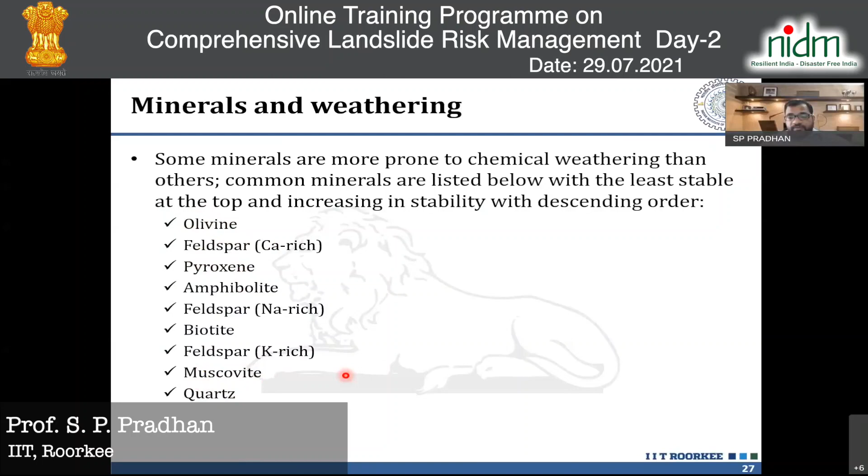So we can put this degree of weathering. These are the minerals with different stability. Quartz and muscovite are stable minerals at the bottom. Olivine, feldspar, pyroxene, and amphibole are at the top, they react with the environment and alter easily. But if you have muscovite or mica, it is a foliated mineral, so there will be a foliation plane, and it may lead to slides.

So what happens if there is weathering? Suppose you have a fresh rock, and you find the RQD is 100%, there are no joints. But if it is slightly weathered, instead of taking 100%, you take the RQD factor and reduce the RQD to between 0.8 to 0.9.

Once you establish the degree of weathering, you can take this RQD factor and reduce your RQD accordingly, because this will be very helpful while calculating your rock mass rating or slope mass rating. Suppose you are not seeing any visible joints during a field visit, and you are conducting your RQD from joint analysis, then if it's slightly weathered, you should reduce the RQD factor. So that needs to be taken care of.

Then there's the influence of mineralogy, as you can see here. Wherever you have clay minerals present, the strength parameter decreases. If the clay mineral content is significant, it reduces your shear strength behavior significantly.

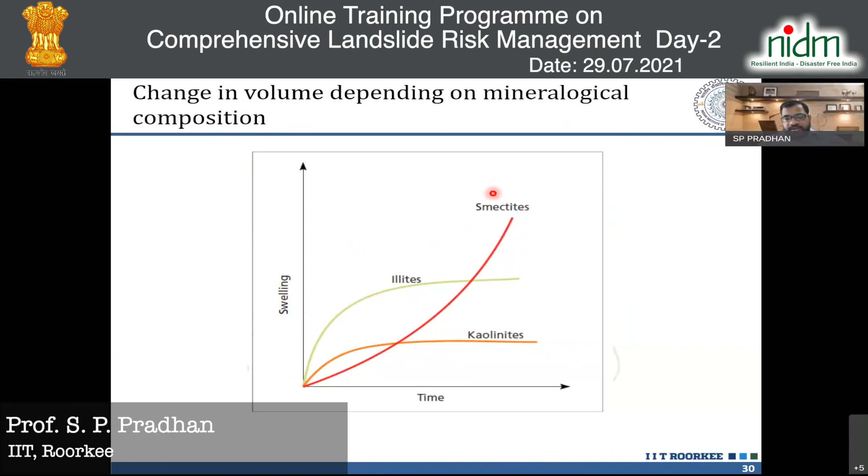Then we can say whether there will be swelling and what effect it will have. I have seen in Eastern Ghat that small amounts of smectite are present, and they are contributing to the failure of the slopes.

Then you can see how mineralogical composition alters rock strength. Suppose you have kaolinite as a clay mineral, along with feldspar and quartz, generally found in sandstone. If kaolinite percentage increases in any rock, the strength will decrease. If you have more quartz content, say in two sandstones, the one with more quartz will have more compressive strength. Similarly, if feldspar content is more, it also reduces your shear strength.

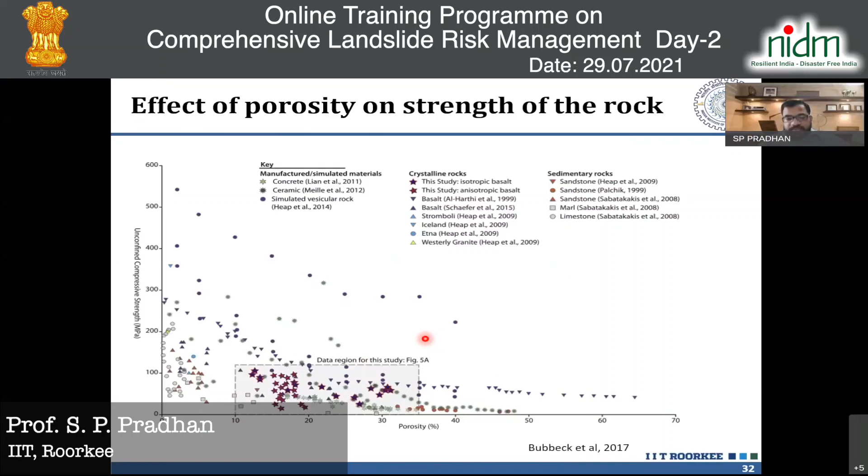Similarly, porosity, as I told you earlier, in case of basalt you get more porosity compared to other rocks, so you'd expect the strength to be less. So all these are field-based observations, and you can incorporate this into your preparation of the DPR.

This already we have discussed. Okay, then role of geological structure on rock mass behavior.

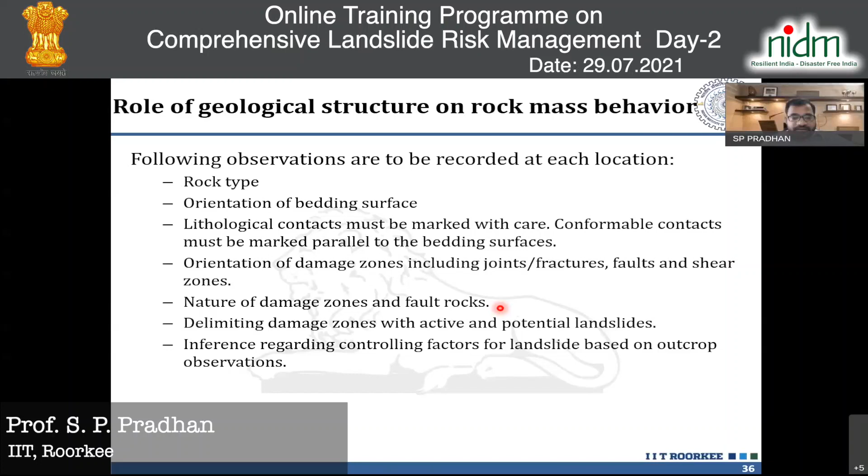When I am talking about geological structure, it means discontinuity, bedding planes, joints. In the Himalaya, this is formed because the Indian plate goes inside the Eurasian plate, and there are many faults. So is this slope near that fault zone? If it is near the fault zones, there will be many joints and fractures, and this is the culprit for landslides, so that we need to know.

You can categorize this type of discontinuity into different types. One is integral discontinuity, another is mechanical discontinuity.

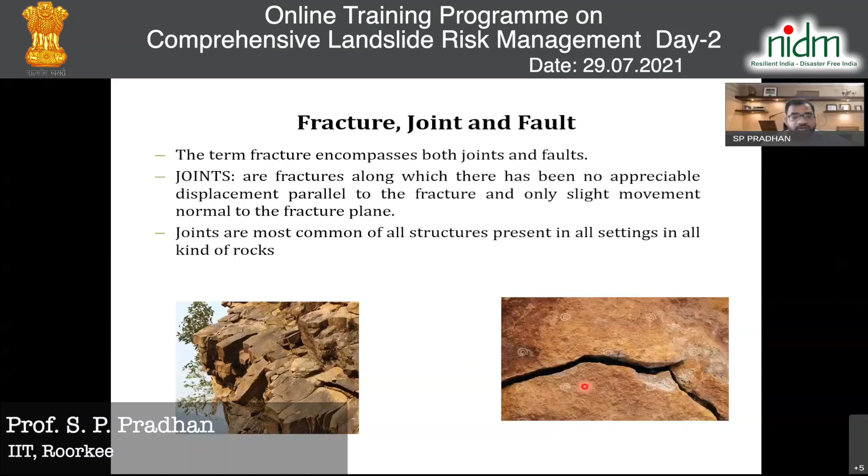In the case of joints, there are, in many cases, closed joints, and in many cases, open joints, and this distance may be filled with infilling materials. You should know if it is a closed joint, it's good, it gives you more friction. If it is an open joint, you will not get any cohesion. If it is filled, and suppose filled with silica sand, it may not hamper stability, but if it is filled with calcite, when it interacts with water, it will wash away, and there will be sliding.

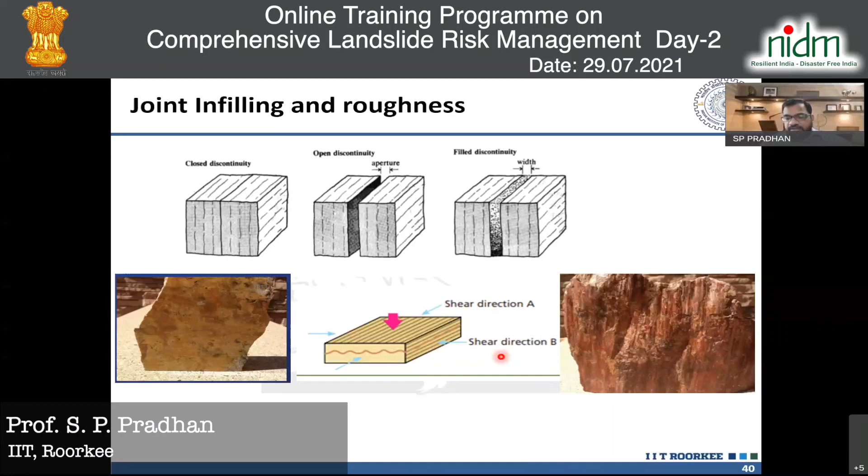Again, you can see the joint surfaces are rough. This linear structure is known as slickenside. So we need to know in which direction shearing will happen. If shearing happens in direction A, it can easily shear, but if the displacement is happening in another direction, it shows some resistance.

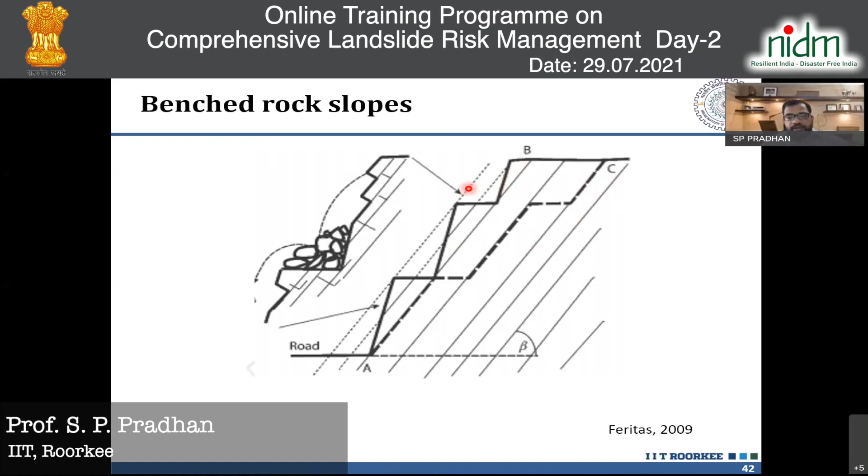So these are very small things, but they should be observed in the field, and they should be properly noted.

While doing your geological investigation for any landslides, you first go for regional scale landslide investigation, then go for local scale investigations. In regional scale, we do desk study and get the literature, and see what is the regional setting. Suppose I go from Rishikesh to Srinagar, that is the Garhwal syncline.

So I know this is a syncline, so I will get faults, I will get folds. So the material units you need to know, and what structure, bedding and joints we are expecting. Suppose you have a slope covered with vegetation, but beside this slope there is an exposed one, then you can see if joints are present here and they're regional joints, we can expect that this joint is also present on the vegetated slope. This gives you many ideas about the structure, the climate, the groundwater, and how seismic activity is there.

From this, then we go for the local scale investigation. You take the locations of that landslide, then note what is the type of landslide, whether it is rotational or translational, what material is involved, debris or soil, or rock. So we say, okay, this location is this.

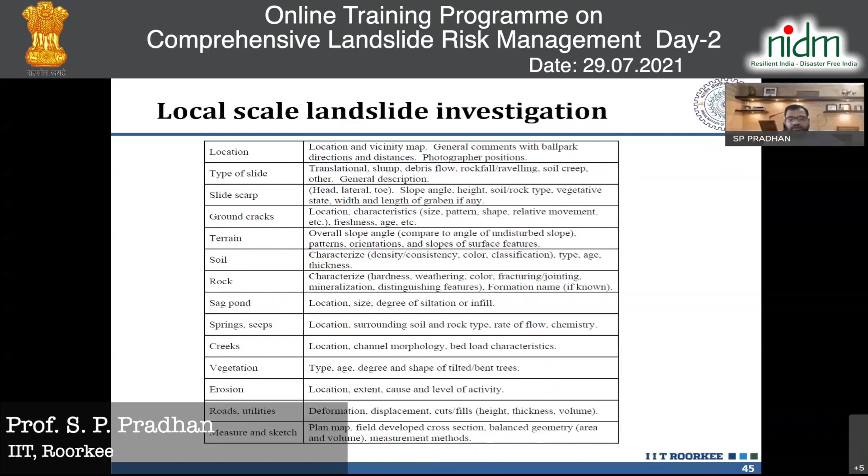I have to rush, that's why I want to show some.

You can see here that once you know there are joints, you can do your kinematic analysis. From this kinematic analysis, you can say which type of failure this is. Suppose if you plot it, you see here there will be planar failure. If two joints are intersecting with each other, then you have a wedge shape block, and that will fail like this. And if joints are dipping opposite at a very high angle, that may lead to toppling type failure.

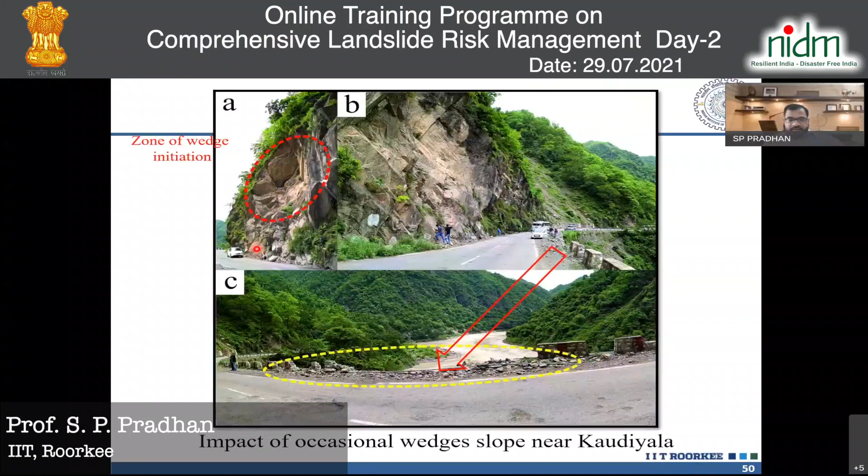This is a wedge failure because these joints are intersecting with each other, and there is failure. This is near Kaudiyala. You can see a rock block that failed from this part. If you analyze this, this joint and this joint intersected, and this rock fell here, and you can see how much damage it has caused. If any traffic was nearby, what would have happened?

Then if you have a debris slide, we move to the slope. You can see, is there any tension crack? Is there any fracture there? If there is any tension crack, then water will ingress. Once water ingresses, the pore pressure will be more, and it will hamper your stability. You can see here even the material is removed from this toe portion. If you are removing material from the toe portion, that will also destabilize this mass, and it will fail.

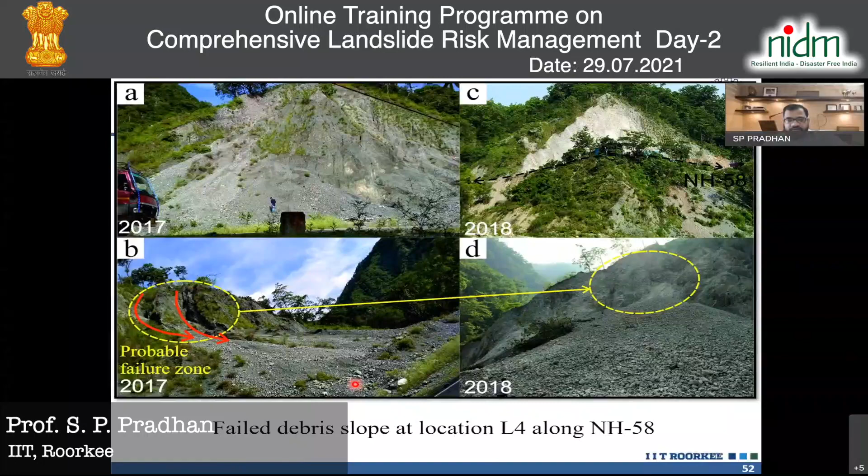This is a progressive process, and you can see there are many cracks. So this landmass will fail, then this will fail. I will show you a nice picture of this in a later slide.

While doing road widening activities, we should know where we should be dumping our materials. If we are dumping at this spot, are we arresting the flow of water? Are we arresting any seepage? If you are putting your dumping zone here and arresting the seepage from the slope, then inside the slope the water will be more, and that will give you more instability.

Maintenance is also very important. Are you giving adequate maintenance for this stability? You can see how this Gabion wall is deformed. There is seepage of water, continuous flow of water, and it is stagnant here. All this leads to instability and will hamper your slope stability, at the toe portion where all this water is coming.

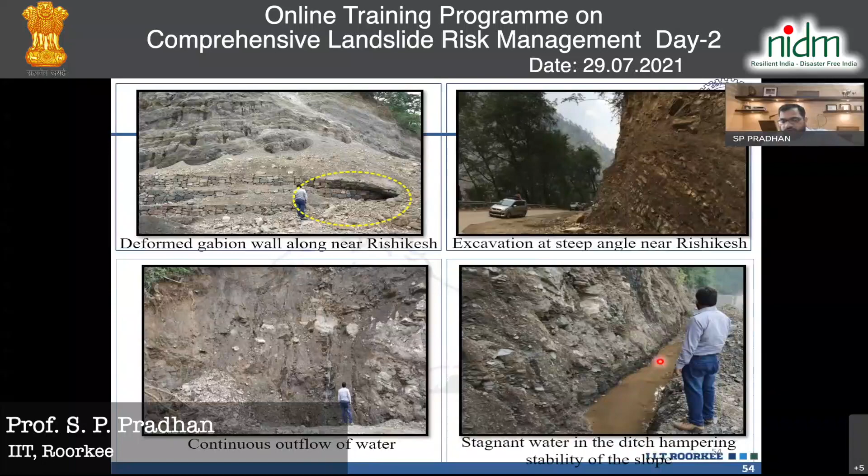So drainage of this water is important. Okay, so this is a very famous landslide that happened in Mandi. Professor Uday knew this, right? He had done work here. So you can see this is a very huge landslide, right?

I have gone to this crown portion at the top of this landslide, and I observed that there is a very big circular fracture, a ground crack there. That fracture is around 30-40 meters beyond this main scarp. So what will happen if, as we know, there is rainfall and water ingresses and the material property changes, then it may give you another slide.

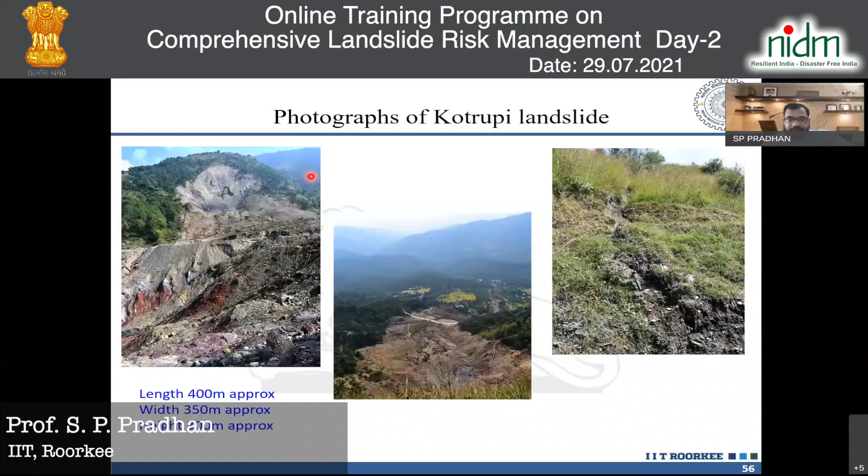So these are a few field observations I have shown you, that we can identify the rock mineral, and we can take it up to do a better DPR. That will be very much helpful for your landslide study, and go for any detailing of your work. Whatever color variation, grain size variation, whatever you are observing, you should note that. Thank you for your kind attention. Thank you.

Thank you very much again, Dr. Pradhan. I think this is a major point which should be emphasized in most landslide studies, because mostly things are either only geotechnical or only geological when we talk about landslide aspects. This particular combination, as you rightly said, requires good communication between the geologist and the geotechnical engineer, if you want to really get into the risk reduction aspect of landslides. While studying or publishing papers, things can still go individually, but to bring it down to practice, this is definitely important. Thank you for highlighting this point and for the good understanding on site-specific geological studies. On behalf of all the participants, I thank you for giving us a very good lecture.